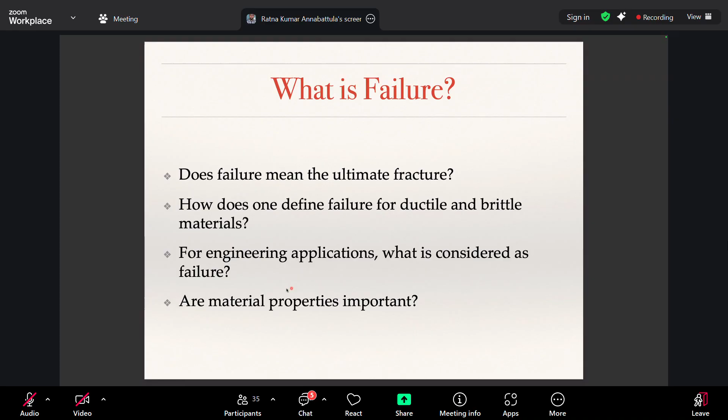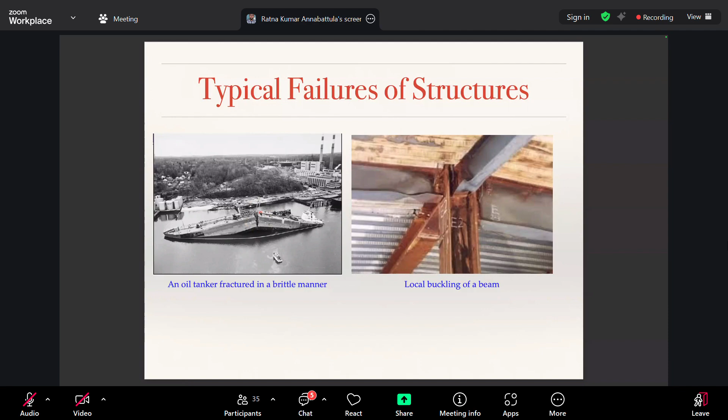So now the question is, why do parts fail like this? Why do structures fail like that? Why this guy has only buckled but did not fail, whereas this guy has actually completely broken instead of giving me a sign like the one on the right hand side? So the question that we ask is, why do parts or why do components fail? I think this is the single most important question that contributes to a rich scientific understanding of failure of materials. If we don't ask this question, why do they fail, then we probably would not have understood a large deal about the failure of the components. So from the mechanical engineering point of view, or mechanical design point of view, whenever we are talking about failure, we try to understand the concept of Mohr's circle, and from there we will talk about failure in a little bit more detail.

Okay. So how many of you are familiar with the concept of Mohr's circle? Just raise your hand. Two. I only see 3 people. Huh? 4. I don't know how to raise a hand. Sorry. Okay. So there are only 2 people. There are some people who have lowered their hands. 3 people.

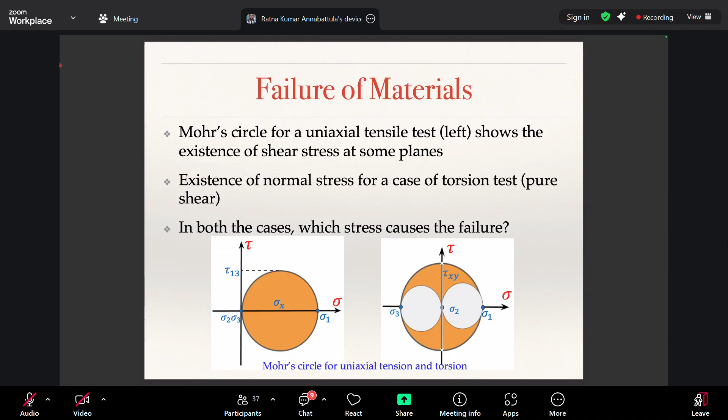I'm sharing my screen in a moment. So you're able to see my screen, right? Yes, sir. Okay.

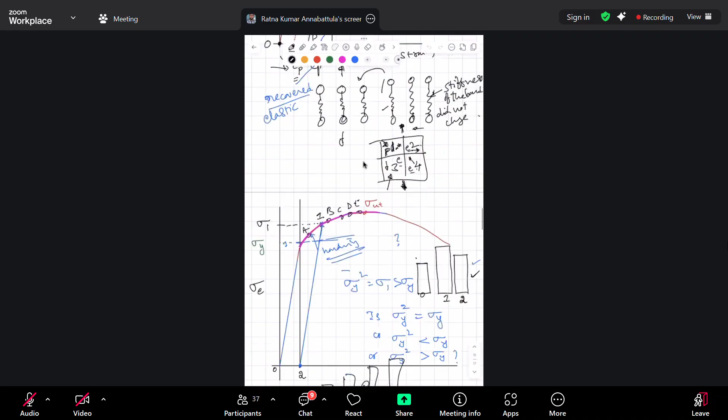So let us talk about the concept of Mohr's circle. Before we discuss the concept of Mohr's circle, I would like to talk about stress at a point.

When I'm talking about stress at a point, I moved back to my slides again, just to drive the idea of the concept of stress. We are looking at an arbitrary body, which is constrained at some point and subjected to some external force. Now if I look at an infinitesimal point in the body, I draw it as an infinitesimal volume element. Is that clear? This is my infinitesimal volume element.

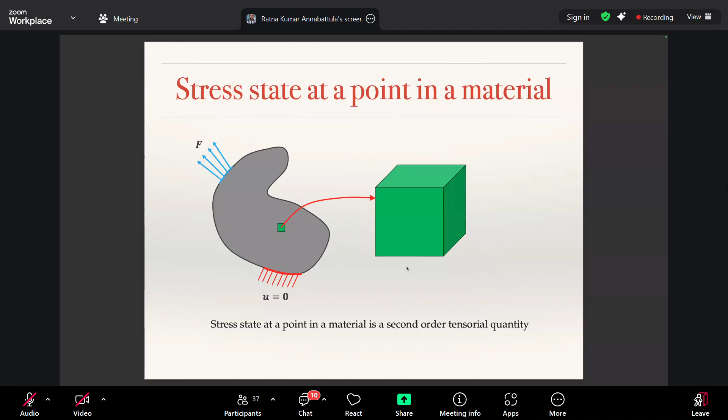If I look at that infinitesimal volume element, I can show my stress state at that point. For example, this is your x-axis, y-axis, z-axis. The normal to this plane is the x-axis. Can you see that? Similarly, the normal to this plane is the y-axis. The normal to the front plane is the z-axis. Is that clear to all of you? Yes, sir. Now, on this particular surface, you will have sigma xx.

The first index represents the normal to the surface on which you are representing this, and the second index is the direction in which it is being represented. So this is sigma xx. That is what we call normal stress, because it is in the direction normal to the plane. In this plane, the plane's index is x, and this is in the direction of y. This is what we call sigma xy, and this is sigma xz. These two components, represented by white color, are in the plane. That is why they are called shear stress components. So you have a normal stress component and two shear stress components.

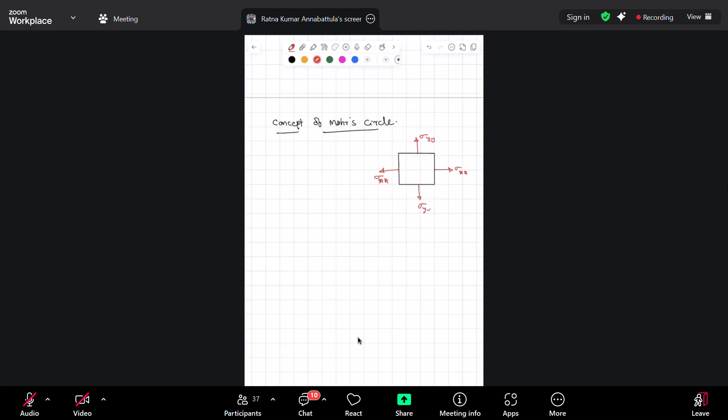If I take a two-dimensional state of stress, then instead of drawing a cube, I will draw a square. On that, that is my sigma xx. This will also be sigma xx. That is sigma yy, that is sigma yy. And that is sigma xy and sigma yx. This is also sigma xy and sigma yx. So this is a two-dimensional state of stress.

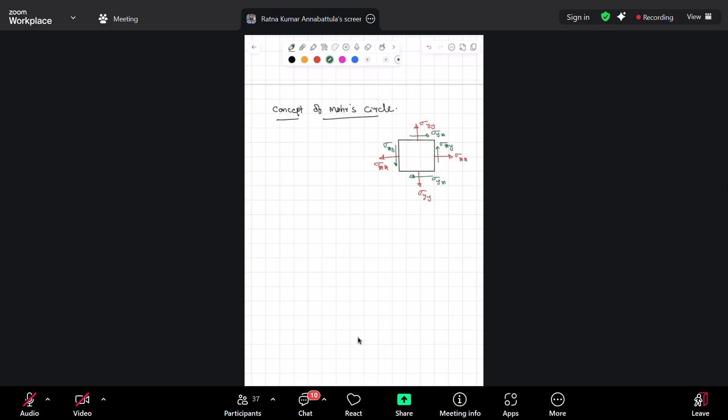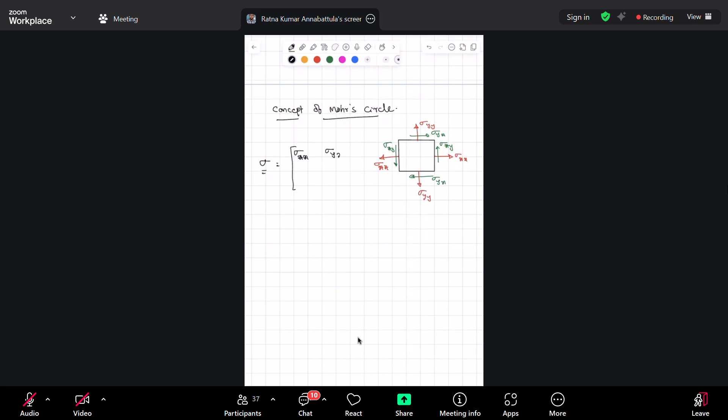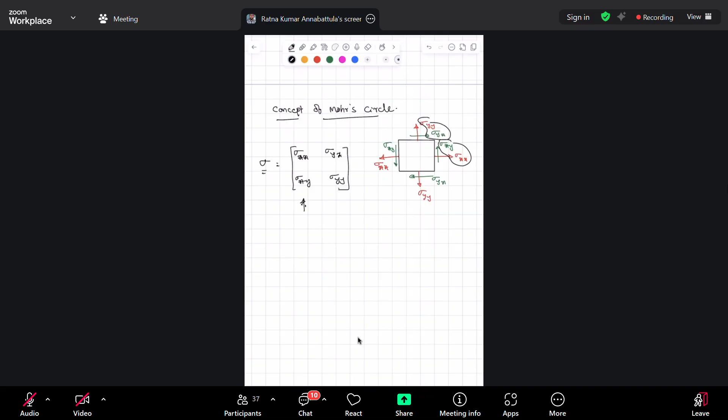It is represented by a second order stress tensor: sigma xx, sigma yx, sigma xy, sigma yy. Maybe these two quantities are coming here, these two quantities are coming there. This is called a second order tensor. What do you mean by second order? Suppose you take a vector, how do you represent a vector? By magnitude and direction.

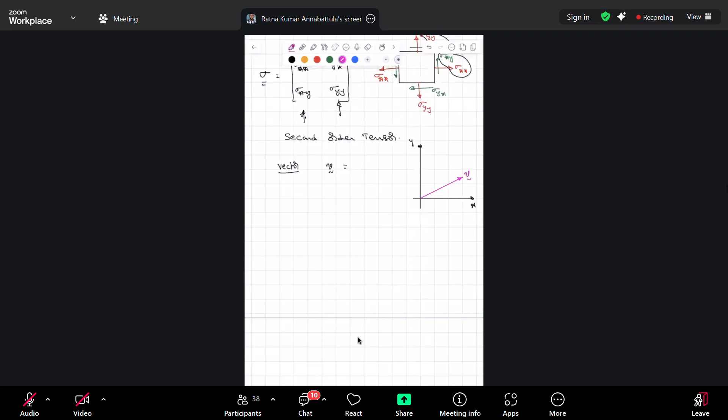So let us look at this. Let us say you have an x-axis and y-axis. I am drawing a vector v. So how do I represent this vector v? Let us say this is how many units?

And this is 1.5 units, correct? So v can be written as 3, 1.5. Can I do that? Can I do that or not? Do you agree? So here Vx is equal to 3, Vy is equal to 1.5.

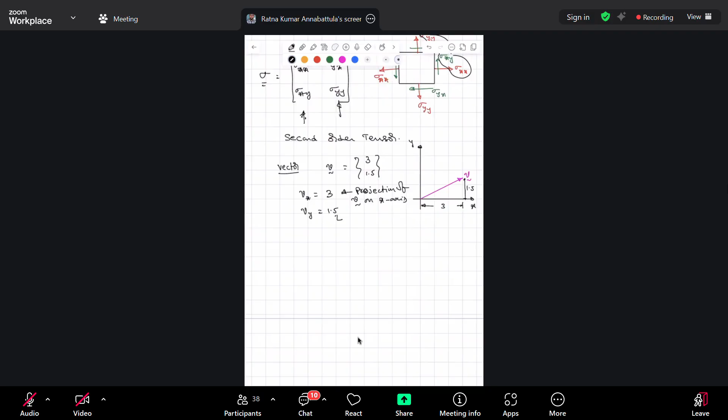That means Vx is the projection of the vector v on the x-axis. Vy is the projection of v on the y-axis. So whenever you are writing a vector, the components of the vector represent the projections of that vector onto the respective coordinate axis. Okay.

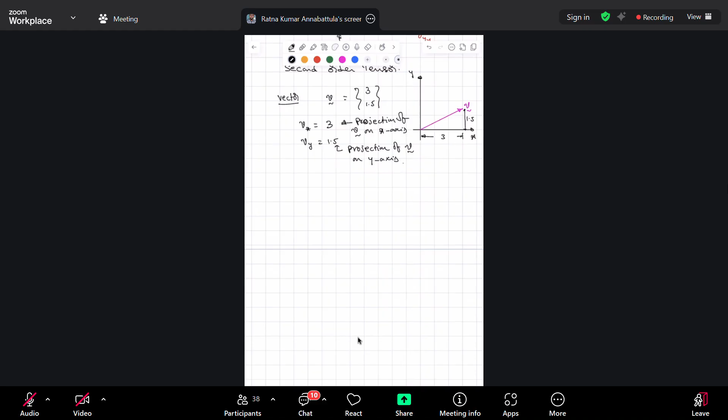So now if you look at this v, 3, 1.5, the magnitude is what? Square root of 3 square plus 1.5 square. And the direction? Direction, typically, you just represent what is this angle. So, theta is equal to tan inverse Vy by Vx. That is equal to tan inverse 1.5 by 3. That is equal to tan inverse 1 by 2. Right? So that is how you represent the vector.

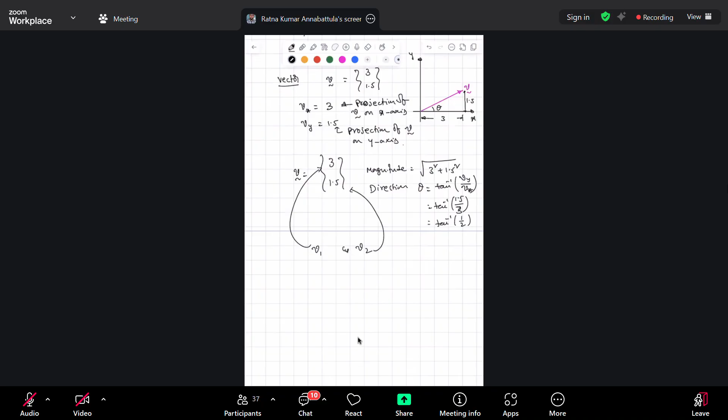So there is another way to represent this vector, right? This vector will have how many components? 2 components here because it's a 2D system. So you say that V1 and V2. V1 is your 3, V2 is your 1.5. So I could represent the vector as V, or I could also write it as Vi, where i goes from 1 to 2. Can I say that? Yes, sir. So in order to represent the vector, how many indices am I requiring here? There is need for only one index. That is why it is called a first order tensor, because I need only one index.

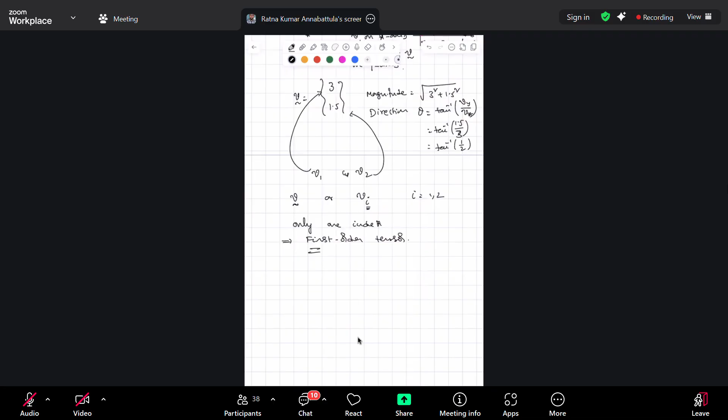Whereas coming to a stress tensor, if I have to represent this, I have to say sigma 11 is sigma xx, sigma 12 is sigma yx, sigma 22 is sigma yy. Correct? Meaning the particular index value: first row, first column, first row, second column, second row, second column, and so on. So in order to represent sigma, I could write sigma, or I could write sigma ij. Since I need 2 indices to access any element, that is called a second order tensor. Okay.

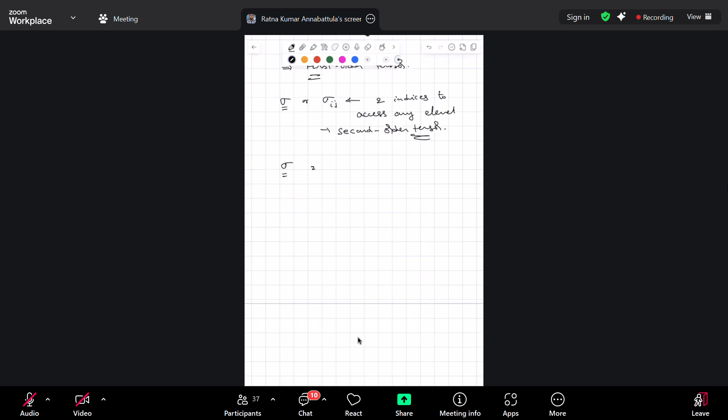Fine. So now you have sigma, which is given by sigma xx, sigma xy, sigma xy, sigma yy. Here I have written xy because it is symmetric. Although we have not used that anywhere, this is a symmetric tensor. That is why sigma xy can be written as sigma yx. Okay. Now, carefully observe.

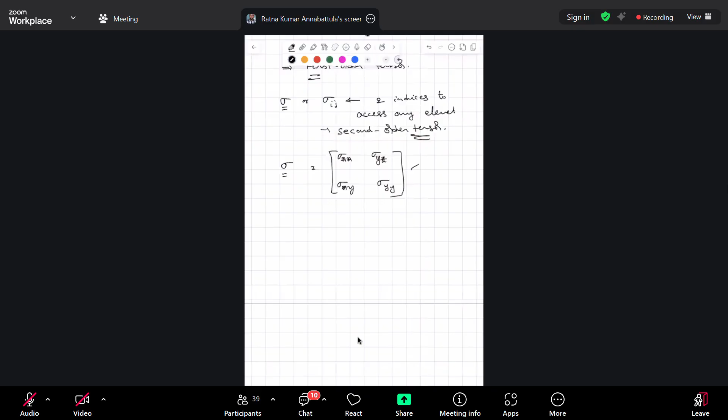For this below, whatever we have written here, that is our x-axis and that is our y-axis, isn't it? So suppose you look at this particular surface, what is the normal to that surface or normal to that edge? No, what is the normal vector? How do you represent the normal vector? What is the normal vector to that? X-axis, isn't it? Is the normal in the direction of the x-axis or not? Yes, sir. So what is the unit vector along the x-axis?

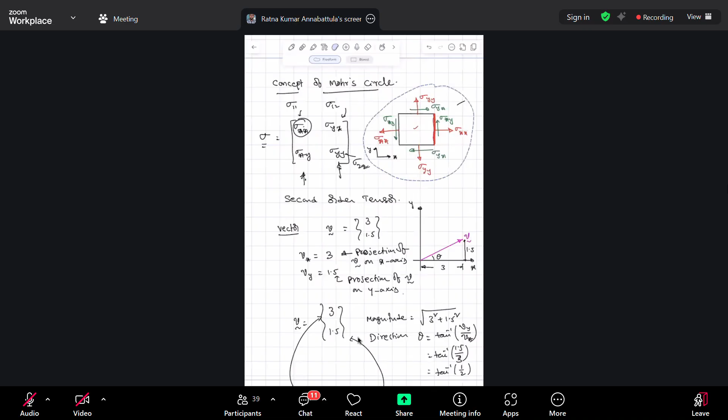Now, the stress state at this point. The stress state that is shown on this infinitesimal element can be represented by sigma is equal to sigma xx, sigma yx, sigma xy, sigma yy. And if that is dotted, this is the dot product of that with E1 hat. E1 hat is 1, 0. What will I get? Sigma xx, plus sigma xy. It is a 2 by 1 matrix: sigma xx and sigma xy.

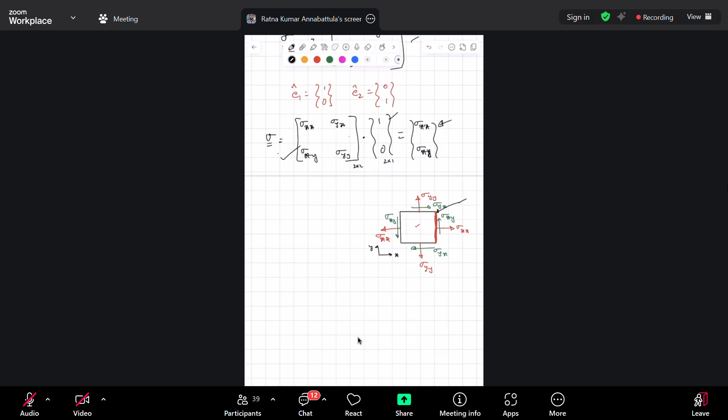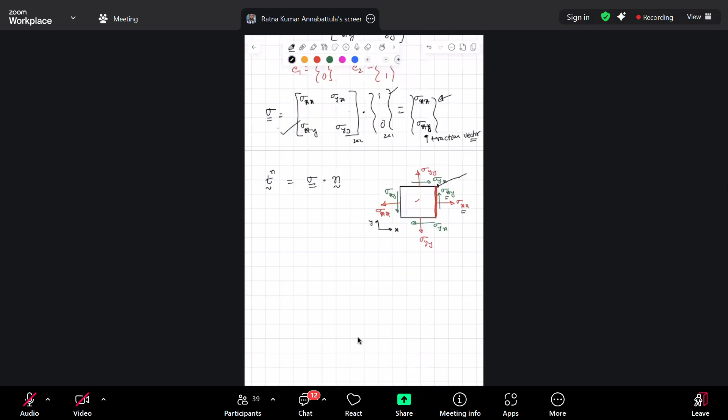What did we get? When I take this matrix, the second order tensor, and find the projection of this vector onto a plane whose normal is this. What is that plane? That is this plane, isn't it? Because the plane's normal is 1, 0. Then I am getting this. That is basically these two components. This is also a vector, isn't it? This we call a traction vector. So the traction vector on any plane n is given by the stress tensor dotted with the normal to that plane. That gives the traction vector on that plane. Okay, T is equal to sigma dot n will give you the traction vector on that plane. Meaning, if you look at this, on this plane, I am again drawing only that particular plane. Okay.

On that plane, I have two components. One component is sigma xx. Another component is within the plane, that is sigma xy. If you have two components, the net will be some vector that I call t. And what is the normal to this particular one? The normal is E1 hat, so I call it t E1 hat. That means the traction vector on a plane whose normal is E1 hat is given by these two, sigma xx and sigma xy. So t E1 hat is equal to sigma xx, sigma xy. E1 hat is the normal to the plane.

So when you take the full stress tensor and find the dot product of that with the normal to any particular plane, that gives you the traction vector acting on that particular plane. Is that clear? Now, on any plane you have a state of stress, which is a normal component and a shear component. If it is 2D, you will have one normal component and one shear component. Is that clear? In general.

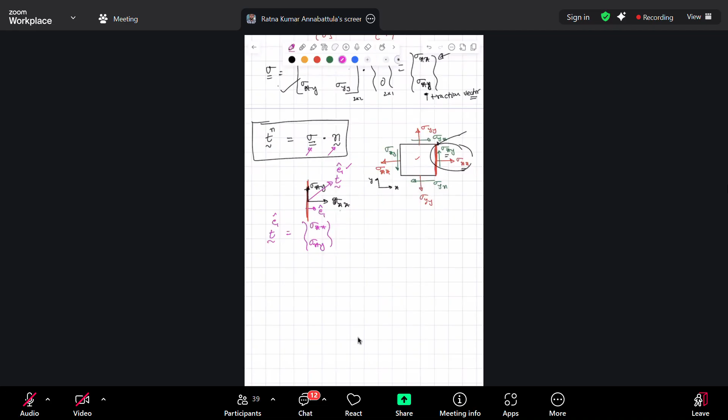So what your Mohr circle says is the following. You take your x-axis as the normal component of the stress, and the y-axis as the shear component of the stress. Now, on any particular plane, you have sigma xx comma sigma xy. Agreed? So identify that particular point. Let us say that is your sigma xx comma sigma xy.

Now look at the other plane here, highlighted by the pink one right now, which is at an angle of 90 degrees to the original plane. So this is a state of stress at a particular plane. Now we are looking at the state of stress at another plane, which is at 90 degrees. The state of stress is what? Sigma yy and again sigma xy. Both of them are the same. So if it is 90 degrees in the physical plane, in the Mohr circle it will be 2 times theta. That means 2 into 90 is 180 degrees.

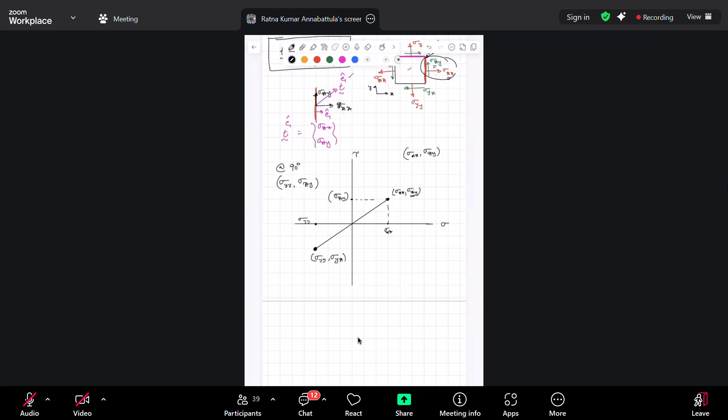You do that, then you have the stress state on one plane and the stress state on a plane which is at 90 degrees to that particular plane. Then you draw a circle connecting these 2 points. And that is your Mohr circle. That Mohr circle will intersect your x-axis at these 2 points. This is what we call sigma 1 and this is what we call sigma 2. Sigma 1 is the maximum principal stress. This is called the minimum principal stress. And this is where you will have maximum shear, tau max.

Now, if you know the state of stress here, then there is an angle. This angle, let us represent as 2 theta. This plane is at an angle 2 theta from the original plane. Whatever may be that angle, how do you find out this angle? Because this is sigma xy by the normal stress difference, you know how to find that angle using tan theta. This is what we call a principal plane. That principal plane is telling you that on that particular plane there are no shear components, everything will be a normal component. Is this clear, how we have drawn the Mohr circle?

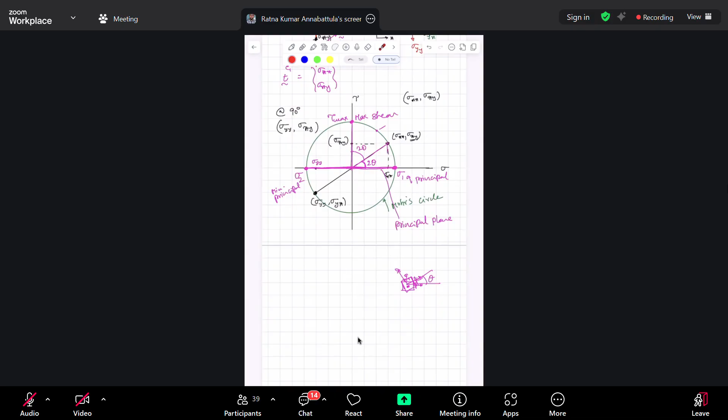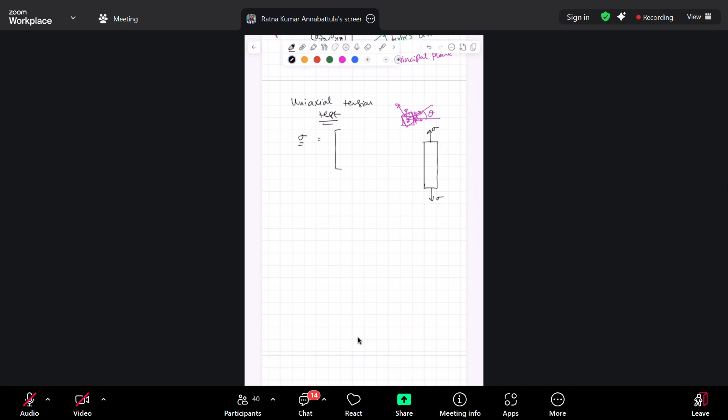Okay. Now, if that is the case, let us try to carefully understand this. Let us say your uniaxial tension test. How do I do a uniaxial tension test? I have a specimen. I apply sigma. That's all, right? So for this, if I have to write the stress tensor in that particular orientation, what will it look like? Let us say that is my x-axis, that is my y-axis. Sigma, 0, 0, 0. That is the stress tensor, isn't it? Because there is no shear stress. Agreed?

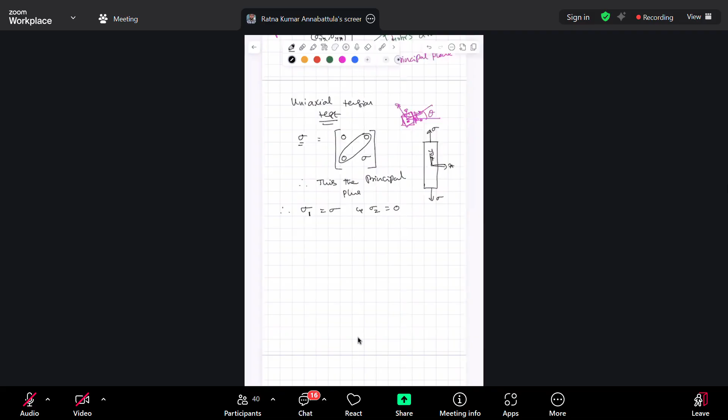Yes, sir. Now, if you carefully observe in this particular plane, the shear stress is 0. Can you see that? Therefore, this is the principal plane. Do you agree? Then this plane is principal plane in the paper. So that means sigma 1 is equal to sigma, and sigma 2, the minimum principal stress, is 0. Maximum principal stress is sigma, minimum principal stress is 0. All of you, do you agree with that? Yes, sir.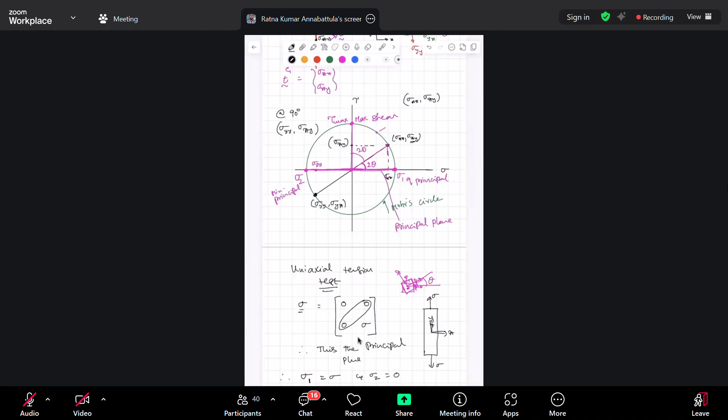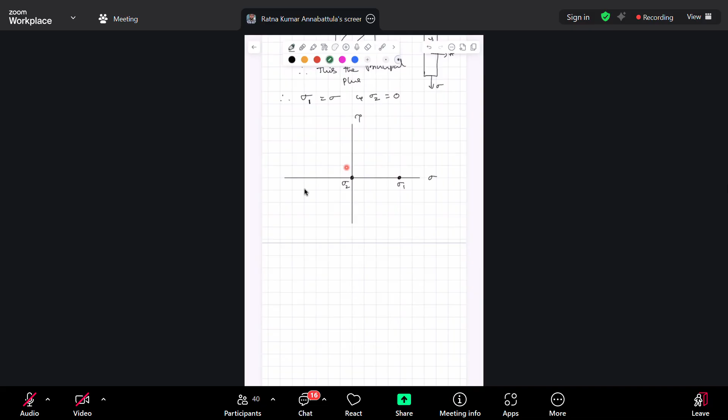Now let us draw the Mohr circle. A Mohr circle can also be drawn if we know the principal stresses directly. You identify the principal stresses and draw a circle between the principal stresses. That is how you draw the Mohr circle. So let me draw first. What is sigma 1? Sigma 1 is some value sigma. Sigma 2 is 0. 0 is this, right? This is sigma and that is tau. So this is my sigma 1, that is my sigma 2. Correct? So how do I draw the Mohr circle? I just have to draw a circle connecting these two points on the periphery. That's my Mohr circle, isn't it?

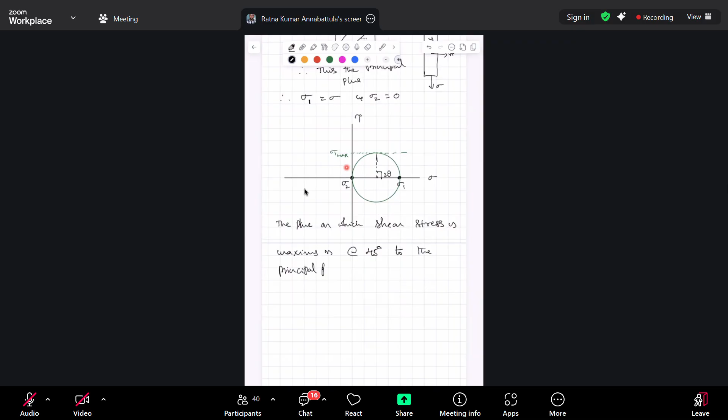So, if that is the case, this is my tau max, isn't it? And which is at an angle 2 theta. That means the plane on which shear stress is maximum is at 45 degrees to the principal plane. So this is the plane. So my x and y axis I am drawing again. That means my principal stress is along the y direction. So the shear stress will be maximum along a 45-degree plane. Along that plane, you will have maximum shear stress. That's what it means, isn't it?

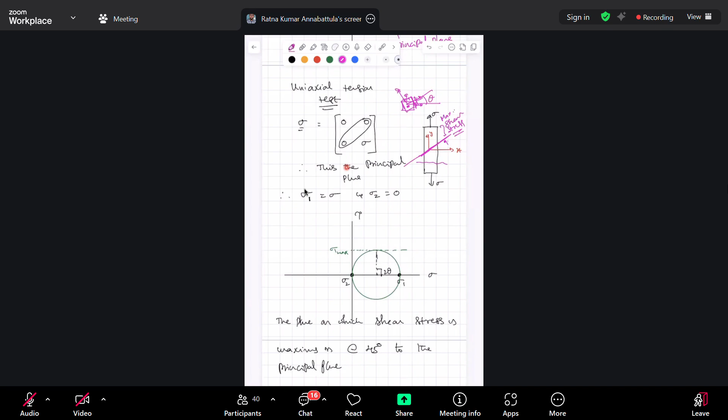Yes, sir. And that is the reason why whenever you take a ductile material and apply a tension load, there will be failure happening at an angle of 45 degrees. The failure will not happen like that. Failure happens at 45 degrees because the shear stress is maximum there. We will see why shear stress plays a role there. Why shear stress is important for a ductile material, we will see later. But the 45-degree serrations that you will see on the plane are because of that. Okay. All right. So this is the Mohr circle for uniaxial tension.

What this basically is telling us is that although in the material I am applying pure uniaxial tension, there are planes oriented at an angle to the principal stress plane, which will have some shear developed on them. Although I am only applying tension in that plane, there are other planes which are experiencing shear. That is what this is telling us. The Mohr circle is explaining that very neatly.

Similarly, if you are doing only pure shear like torsion, pure shear implies the principal stresses are of opposite signs. Sigma 1 is equal to minus sigma 2.

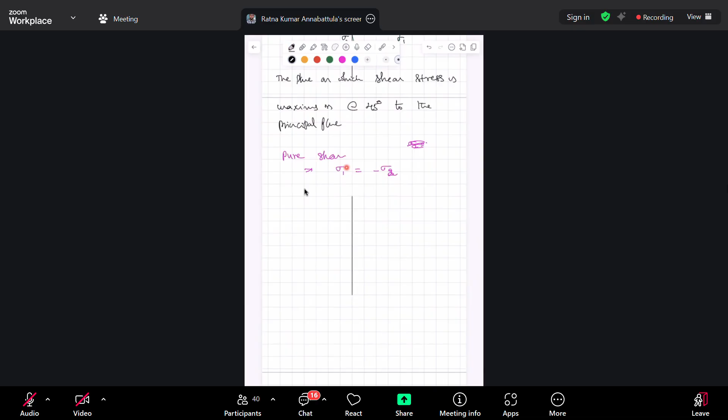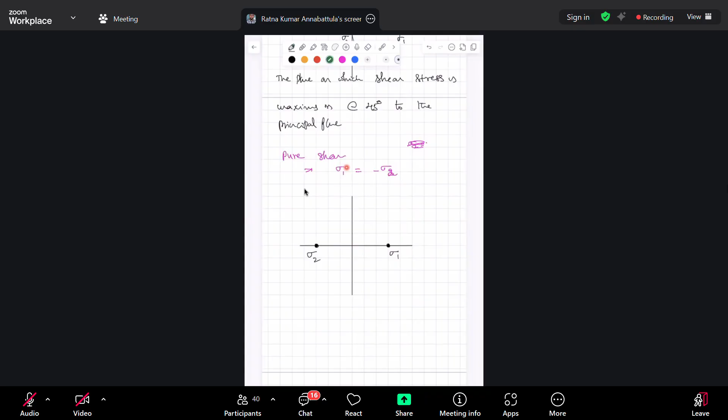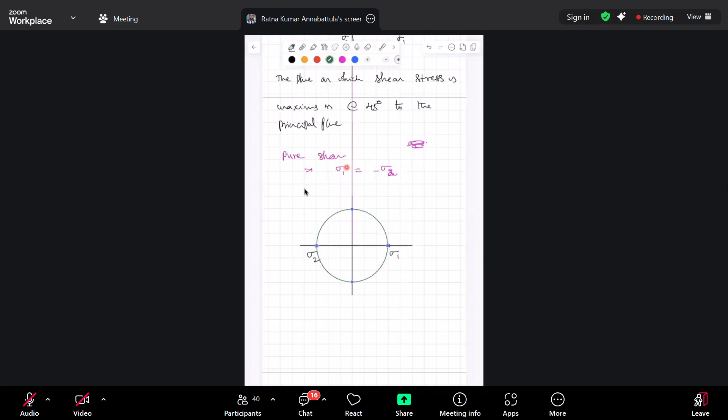And minimum principal stress is 0. So let us say they are opposite sign, sigma 1 and minus sigma 2. That means if this is your sigma 1, that will be your sigma 2. Then if you draw a circle, you will have this as your sigma max, tau max, the maximum shear stress.

Right? So this is what we call Mohr circle for pure shear. That means you have a situation where there is only shear stress, there is no normal stress at all. That is why it is called pure shear. Although there is a point at which you only have pure shear, there are planes at which you will have a combination of normal and shear stress or only normal stress.

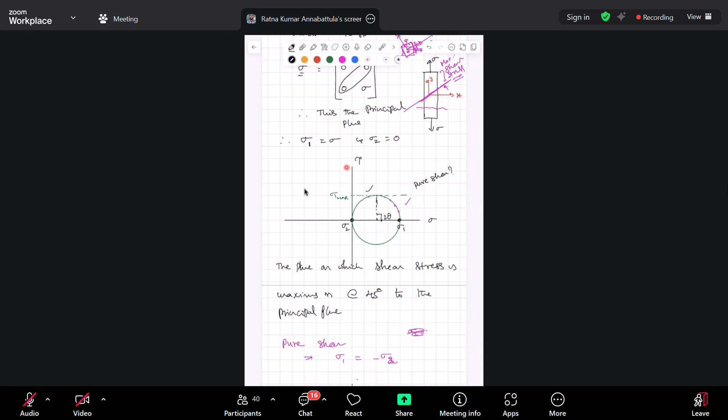Suppose you look at this fellow, is there any point where you have a scenario of pure shear? What do you mean by pure shear? At that particular point, your normal stress has to be 0 and only shear stress should exist. There is no such point. So when you are applying uniaxial tension, you will have simple shear, but you will never have pure shear. Okay? By looking at Mohr circle, you can make certain observations about the behavior of the stress state. Any questions?

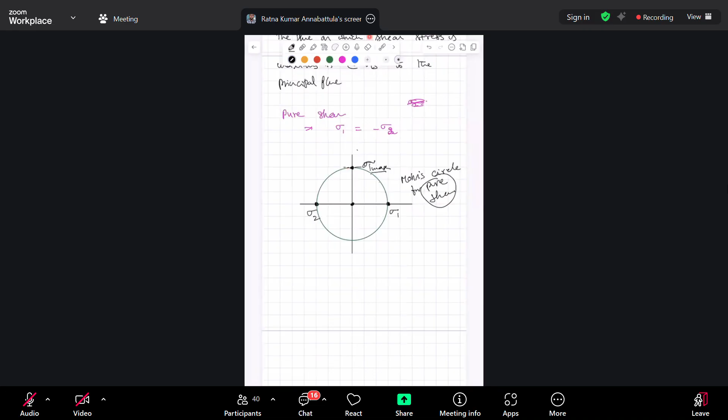Sir, if we take into account Poisson's ratio, then you will also have a component in the other direction also, right? No, we are only talking about the two-dimensional state of stress. Whenever you have a 3D state of stress, then that comes into picture. That we are not looking at. Okay, that we will talk about.

Hello? You're audible. Can you see the screen, right? Yes, sir.

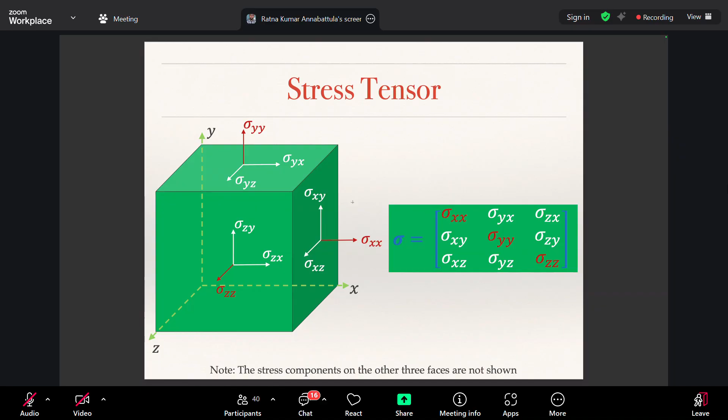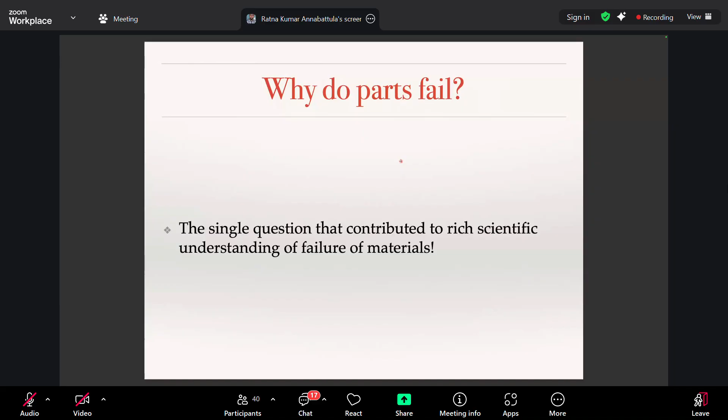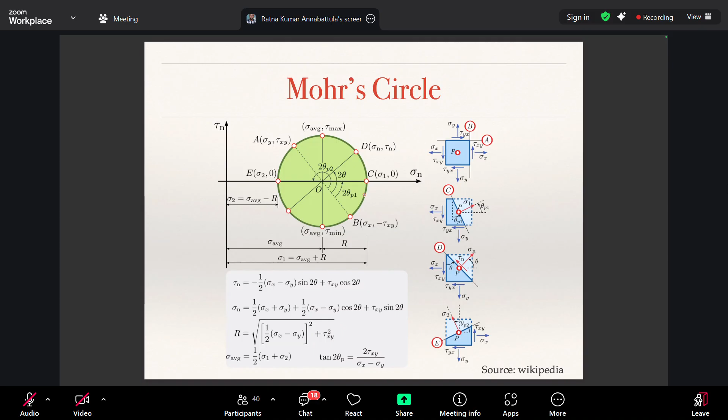Okay. So now, if you look at this Mohr circle, if you know sigma x, sigma y, and tau xy, then you can calculate the normal and shear components like this, where you need to plug in the values, and then you'll be able to identify the stress state at various locations. That's this formula. You can go through it. You would have learned it in your BTechs. Okay. Now, how do you draw Mohr circle for 3D?

Whenever you are dealing with a three-dimensional state of stress, you will have three principal stresses instead of two. That is sigma 1, sigma 2, and sigma 3. When you had only two principal stresses, what did you do? This is sigma 1 and that is sigma 2, and then you just drew a circle between sigma 1 and sigma 2. That is one Mohr circle.

But if you have three principal stresses, you can identify sigma 1, sigma 2, and sigma 3. Then draw a Mohr circle between sigma 1 and sigma 2, another one between sigma 1 and sigma 3, and another one between sigma 2 and sigma 3. The area represented in the green color is the valid area for the stress state. So this is how we identify the Mohr circle for 3D. Then, depending upon the state of stress, we will be able to figure out what kind of stress state you are going to have at various orientations. And here you can see the maximum shear stress will be (sigma 1 minus sigma 3) by 2, where sigma 1 is the maximum principal stress and sigma 3 is the minimum principal stress.

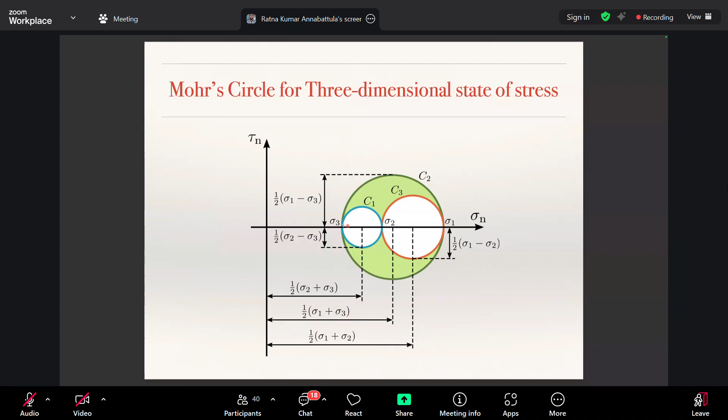Okay. Now, if you are doing a static tensile test, in general, the ductile materials are limited by their shear strength. Why? Whenever we are talking about failure, for a ductile material, the failure is defined by onset of plastic deformation, because once the plastic deformation begins, then your component is considered to be not delivering what it is functionally supposed to deliver, because there should not be any plastic deformation in the material. So when the plastic deformation onsets, that is when you consider a ductile material has failed.

How does plastic deformation begin? What is the mechanism for plastic deformation in a ductile material? Shear. Dislocation motion. Right? Dislocation motion is what represents plastic deformation in a crystalline material. How does dislocation motion take place? Dislocations move under shear, right? So that is why they are limited by their shear strength.

Whereas in brittle materials, there is no dislocation motion, and hence the failure is represented by complete fracture. Fracture means normal strength. The atoms should be separated from one another. That is why brittle materials are limited by their normal strength. Since ductile materials are limited by their shear strength and brittle materials are limited by their normal strength, the same kind of condition which governs the failure of ductile materials cannot be used for brittle materials. That means the same kind of failure theory does not explain the failure in all the materials. So, depending on the class of materials, you have to develop different failure theories.

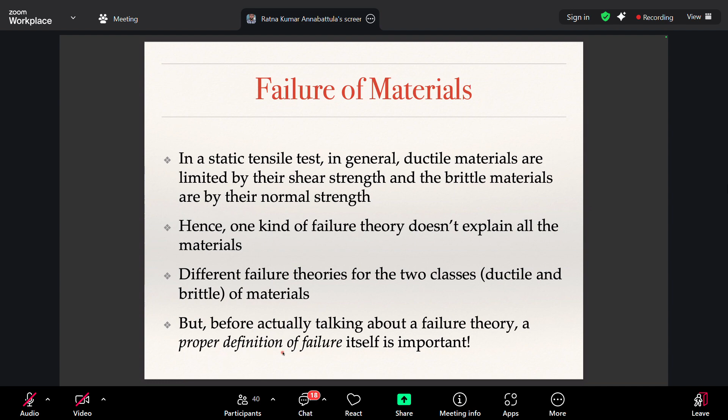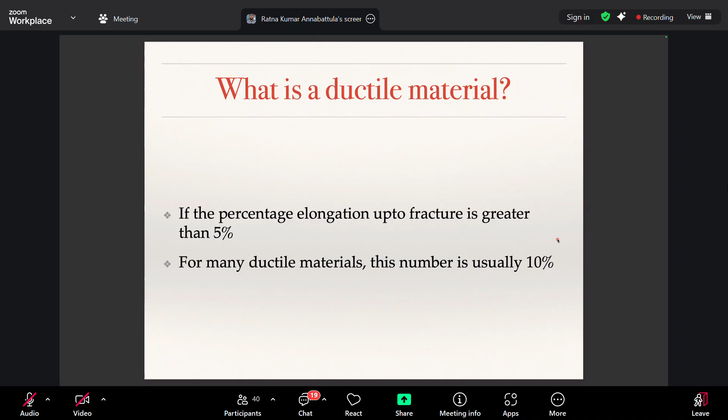So, okay, we know that the mechanisms are different and hence you have to develop different failure theories. That is fine. But before we actually talk about a specific failure theory, we need to develop a proper definition of failure, as we were discussing. A material is considered a ductile material if the percentage elongation up to fracture is greater than 5%, and for many materials it is up to 10%. That is how you define a ductile material.

So, if you are talking about a component, it can be considered to have failed if it yields or plastically deforms, leading to improper functioning. In some cases, the component may fail by fracture. As we discussed, both are failures, but the mechanisms are different. In addition to this, is the failure, whether by yielding or by fracture, happening because of a static load or a varying load? All these things will determine how we are going to talk about failure in a material.

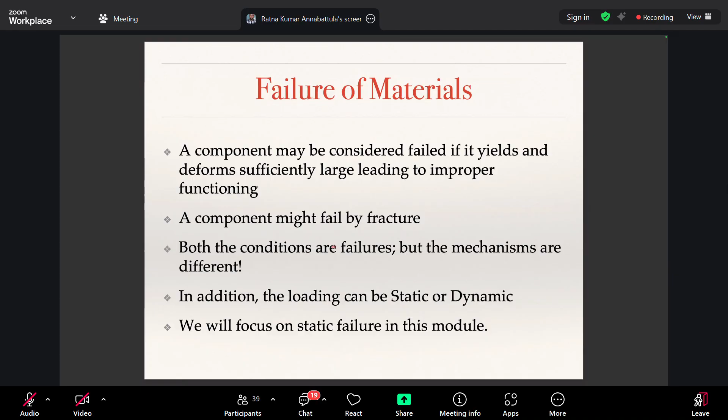As we have discussed, we will first focus on ductile materials and we will only focus on static failure in this module. So ductile materials fail by fracture if loaded beyond the ultimate tensile strength. But most machine components made of ductile materials are considered to have failed if they cross yielding or plastic deformation. The yield strength of a ductile material is much less than the ultimate tensile strength of the material.

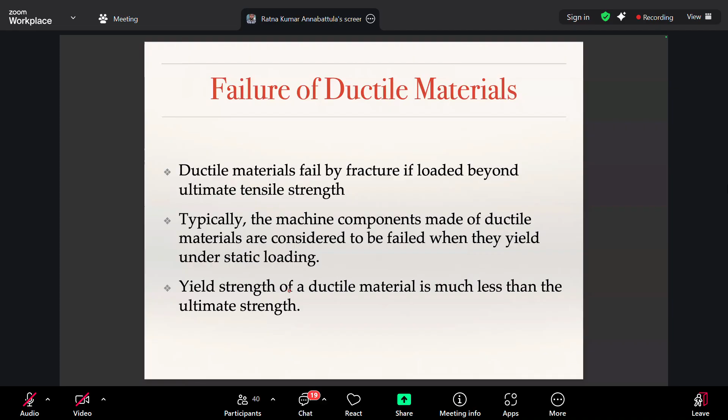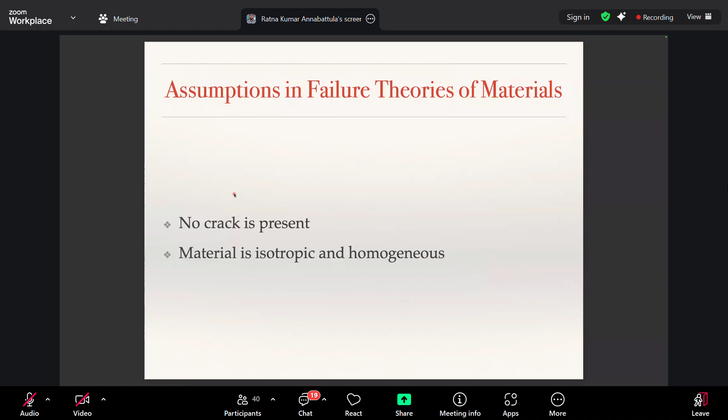But in order to develop such a theory, we have certain assumptions. The assumptions that we are making in this work are, first, that there are no cracks in the material. And the second is that the material is isotropic and homogeneous. These are the two fundamental assumptions. With these assumptions, we are going to develop a failure theory.

All right. So what is the general form? How does this failure theory look like? We know the resistance of a material to yielding is given by something called the yield strength of the material. And if the failure is to be represented by the ultimate strength, that is when the fracture is happening, your failure criterion for an isotropic material can be expressed as some function.

That function depends on sigma 1, sigma 2, sigma 3. These are three principal stresses. These three principal stresses are unique for a given state of stress. So if you develop a functional form which depends on sigma 1, sigma 2, sigma 3, and when that functional form becomes equal to the failure strength, if it is a ductile material, the sigma c will be yield strength. If it is a brittle material, that sigma c will be ultimate tensile strength.

So if we can develop a functional form like that, that will be really useful, without actually worrying about whether you have applied a uniaxial state of loading, biaxial state of loading, or triaxial state of loading. This functional form should be able to capture that. And sigma c will be chosen depending on whether it is a ductile material or a brittle material. So that is the kind of failure criterion or theory that we are looking to develop.

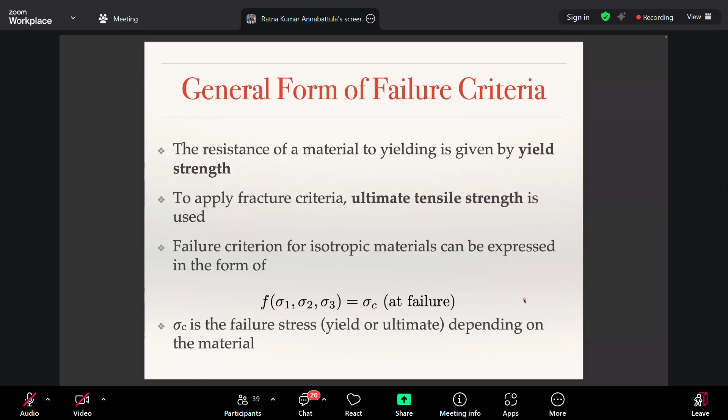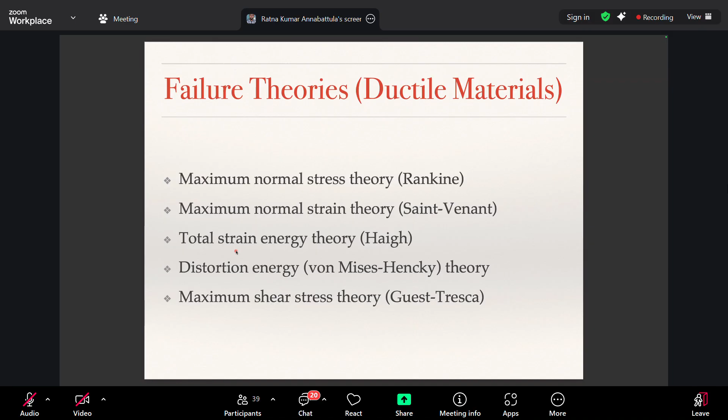Okay. Maximum normal stress theory, maximum normal strain theory, total strain energy theory, distortion energy theory, maximum shear stress theory. These are the failure theories that we are going to talk about in this course. I think I'll stop here and we will meet next week where we will talk about the invariants of the stress tensor, which is important to drive the point why we are writing the failure theories in the principal stress space. Okay. Any questions here?

Okay, if there are no further questions, I know we are stopping early today, but we will leave it here because the next thing requires some continuous effort, so we will do it in the next class.